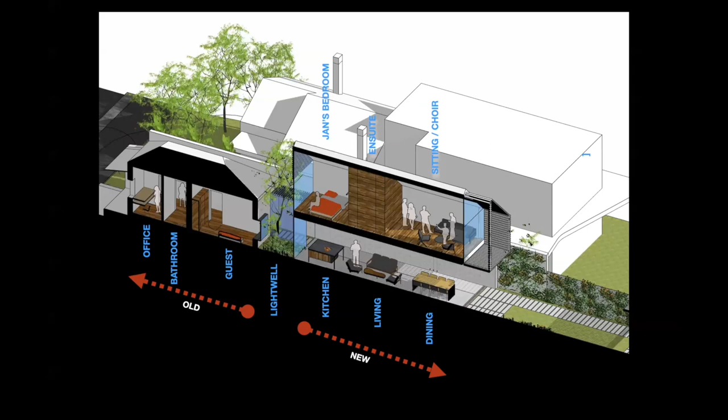Okay, cool. So we had a similar brief last year, for a house we finished last year for Belinda, a single elderly woman living on her own with zero future earning potential and zero potential to lend money. Jane is in a similar position, but with a good budget, 1.2 max, but prefer 1.1. I want independent living, I want to age in place until I die, and I want it to be as sustainable as possible so that it's not just about the climate crisis, but also so it drives down my running costs in the future.

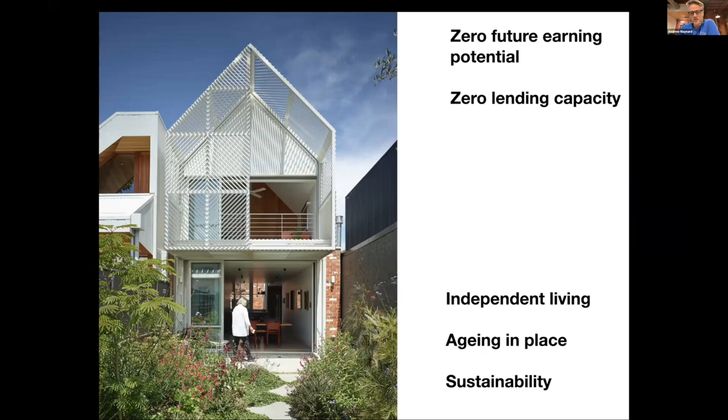Gorgeous little cottage in Clifton Hill, a beautiful part of Clifton Hill. As we do with all of our alts and adds, we pull the new and the old apart so that they have their own sort of discussion. We never crash the new through.

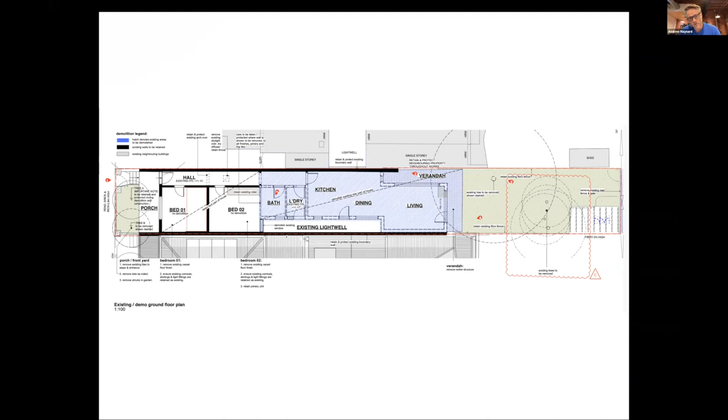There was an extension done in the 80s that was really lightweight, falling to bits, thermally very poor. None of it was salvageable, so we removed that. At the original front room, we cut it into two so she has a study space. She's very well connected with this community, she's lived here for a long time, so she's constantly waving at and chatting to people from her study space where she does her crafts.

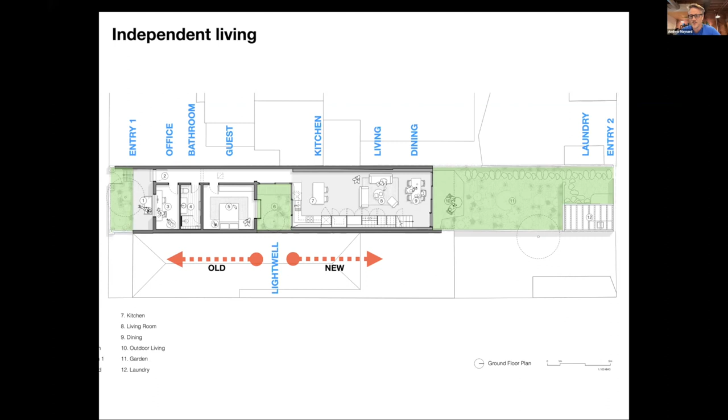Then there's a bathroom, a guest bedroom, and the new part of the house: kitchen, living, dining, facing north. Interestingly, she wanted an external laundry, so it forces her to wander through the garden to do the laundry. Upstairs is her bedroom, ensuite, and her sitting/choir room.

That's one big shared space, part of her brief was that she actually has a choir that comes over every now and then. So it's great getting photographs from clients of how they use the space.

I got told the acoustics were brilliant, which is great because we have no idea about such things. And the neighbours loved it as well with the doors open.

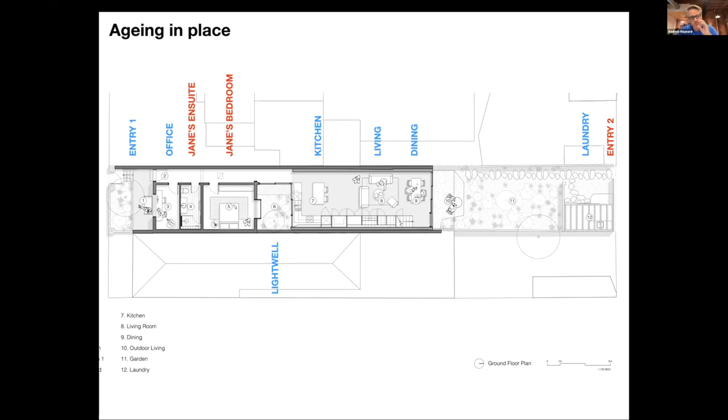So that's the independent living model, but then it can transition into an aging in place model where Jane can just live on the ground level. The bathroom becomes her ensuite, the guest room becomes her bedroom. She can use the entry at the rear, which brings her on level. We couldn't change the front because of heritage. And then in the future, she could have a carer use upstairs as their flat, or she could decide to rent that out and have a housemate.

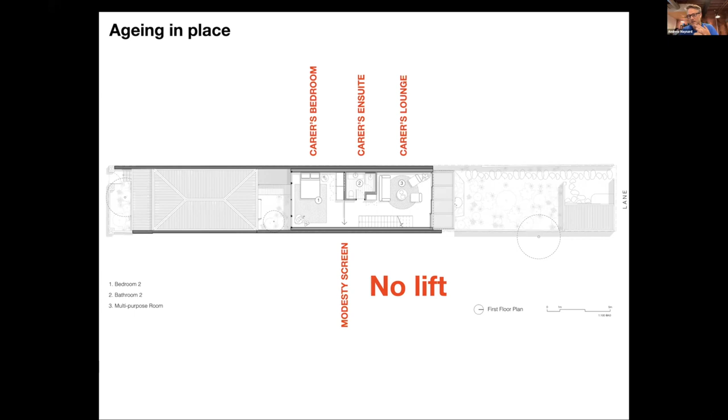But importantly, when we have these discussions with clients, one of the first things that pops up is a lift. I want to age in place, therefore I need a lift. We really try to critically work our way through that, especially on smaller blocks, because it's a huge amount of money that's rarely ever used. What is the actual benefit of that? And how much space does it take up? That's why I think we really resolved it here, living on one level.

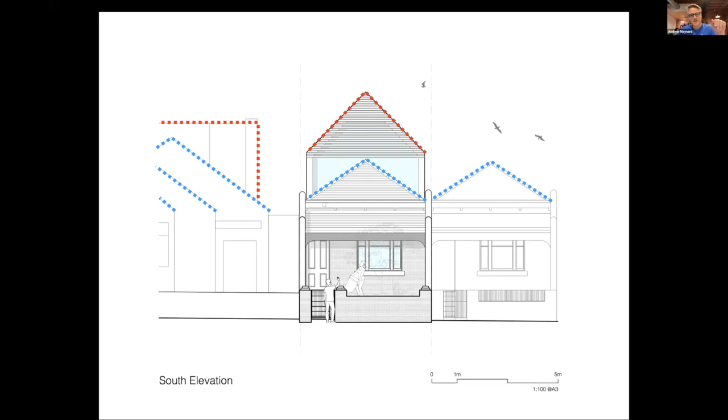In terms of how it sits in its fabric, beautiful heritage place. So we've done the pitched roof so it really fits in, and we've avoided doing the box extension just tacked onto the back, in terms of how it sits, which works really well in terms of visual bulk from the backyards as well.

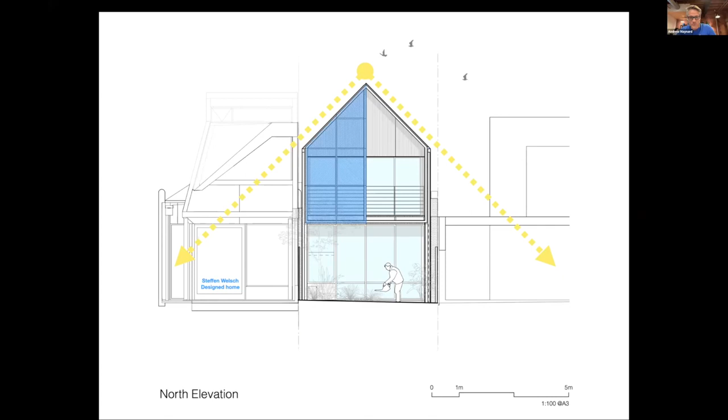Steffen Welsch was designing the house to the east at the same time, and he asked for drawings. We thought, oh cool, maybe we'll have these little discussions, but instead he strangely just leant his building against ours. Just fine, each their own. And then we screened one side because there was really prominent views to and from the backyard.

So grab rails, just thinking about how she uses it over time. We didn't upgrade the insulation in the old house, so putting a door there because it's much more thermally efficient in the new part of the house. Really resilient wet areas, which would be great in terms of managing it into the future.

The guest bedroom and the little window seat that looks into the shared courtyard. And then crazy paving on the link between the new and the old, so it really feels like part of that outdoor courtyard area. And the way that the corner then peels away so that the kitchen melts into that courtyard space, looking back towards the old.

And then stacking all of the storage under the stair, and as we often do, a sliding splashback, so the toaster and the kettle and things like that are all plugged in. You can just drop them down, but then get them out of the way so they don't just take up bench space. And then everything really functional and easy to use as you get older, but then also can just be hidden away.

And then as we head out the back, really resilient garden, but a flowering garden was really important to her. And this was a great moment, sort of just saying to the bricklayer, stop, leave it snotty. We want snotty brick, which turned out really beautifully.

And then the beautiful screen that deals with, adds shadow, becomes the sort of passive solar line for downstairs as well, and deals with some of the privacy issues coming from Steffen's building.